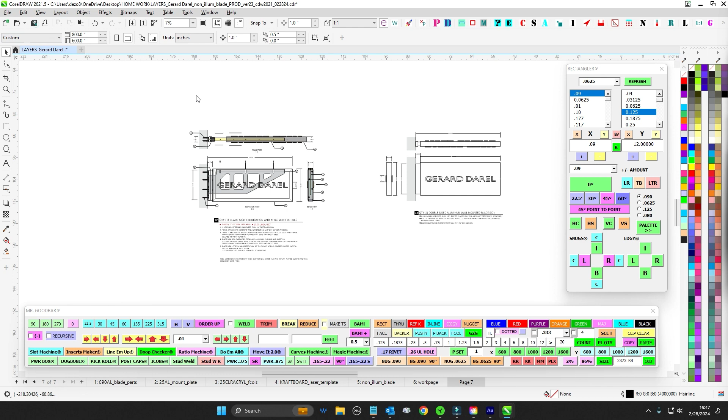All right, so real quick here, we got this Gerard Darel blade sign. So right off the bat, you guys can probably see that it's something you've already made before. It's this collar though that meets the wall. It's kind of funky how it gets kind of skinny before it gets to the actual blade sign itself.

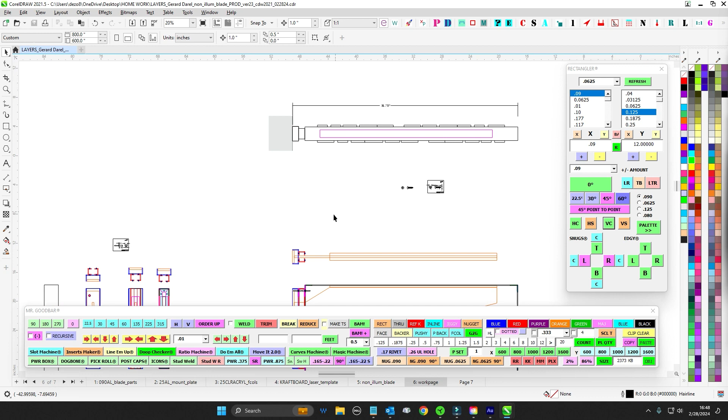So I just wanted to go over the order of operations because, as they say in the industry, it's hella fiddly. It's got all these little parts and stuff. So I just want to go over that to make sure you guys are clear. Otherwise, this shouldn't be that big of a deal. So let's get after it. So we got the lay of the land.

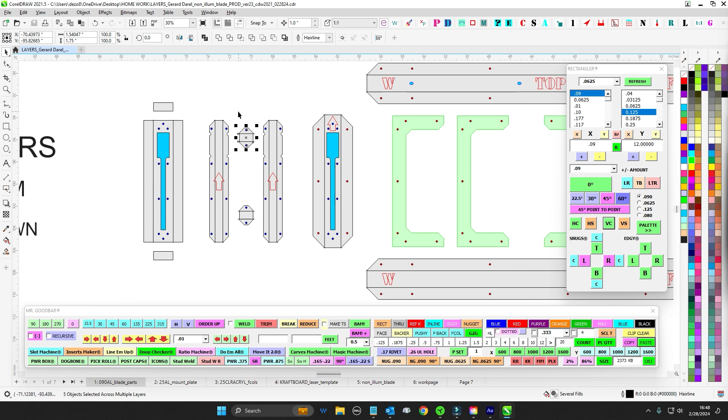So again, look for these little pieces. You're gonna have these little end caps. You've got these two little pieces. So don't lose those. Make sure you get all that. You've got the actual blade parts. You got your jigs and your two faces. The faces don't have any holes in them because it's going to be lasered out.

And then you're going to have your aluminum mount plate. This should look familiar to ones you've made before. So letters are going to go to laser, and then you'll have that Kraftboard template material lasered out. And then this is getting shipped out, so let's make sure all this goes. But we also have that pattern.

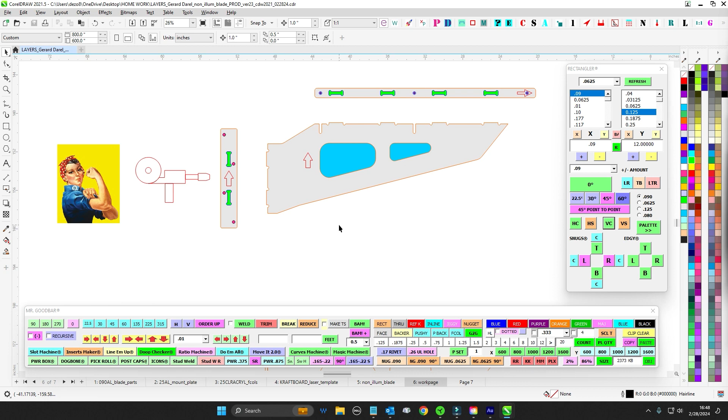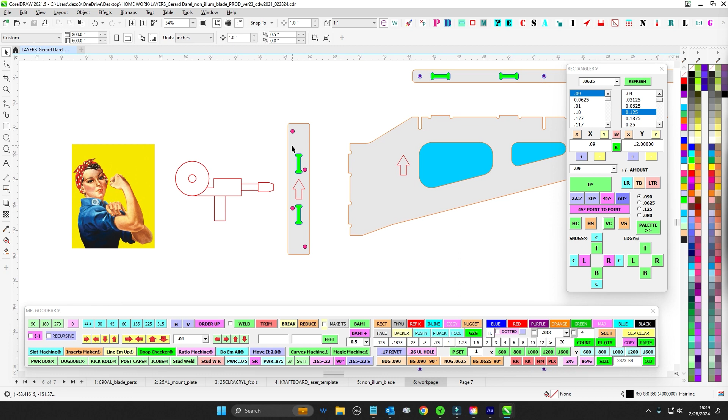But this guy here, because I usually give you guys a little side gusset, this one doesn't. So just make sure you're 90 and make sure it's welded up really well, because it's just got this sort of flapping out there in the breeze to support all of this. So just make sure that gets welded up good. And that's it. You're done there.

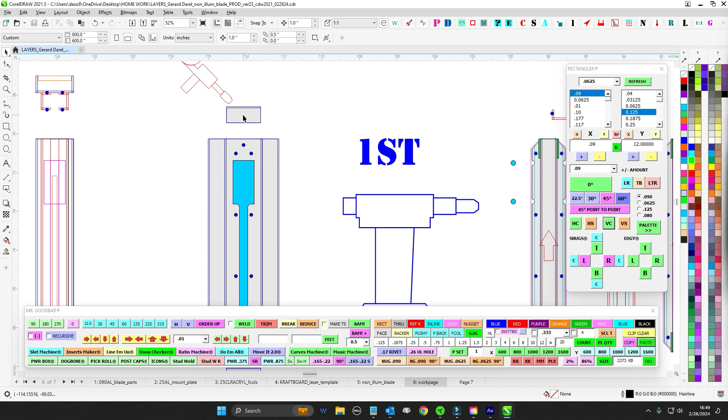So what I wanted to point out was this bracket system. You're going to have the part that meets the wall. Just bend that up C-channel and then tack in the end pieces there. Cool. And then you're going to bend up these little fiddly bits, and it's going to make this tiny little frame. It's only a 1/2 inch flange, so it is going to be kind of... and then the idea though is, see where these notches are.

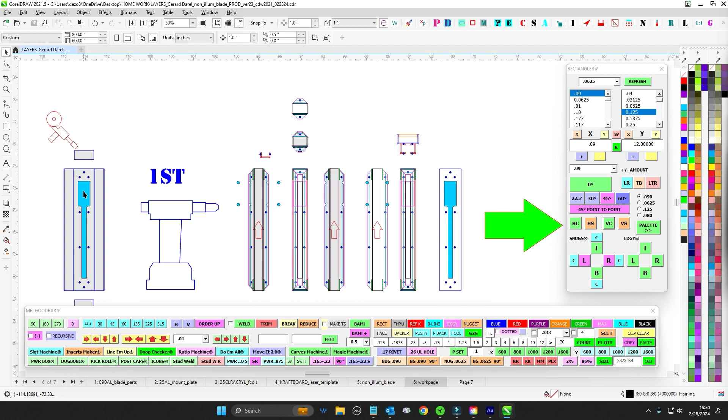This needs to get notched out to match this, because this notch allows this whole thing to slide over the bar. So you're essentially going to be coming up and over the bar here. And you can see where the hole, in between the magenta, matches the hole for this to go through.

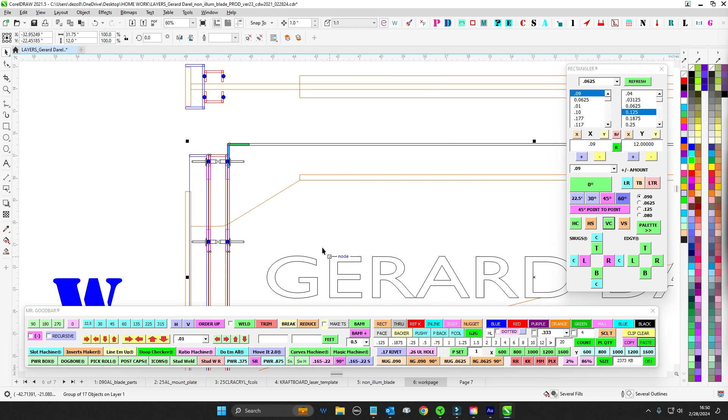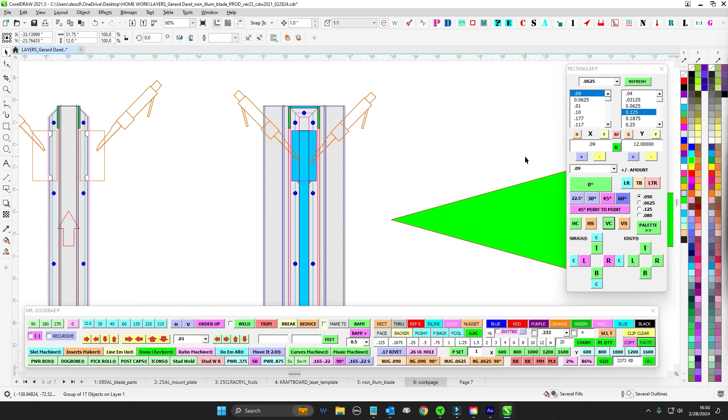So in order for this to get seated on there properly and to clear that, you have to have that big notch. Problem is that notches these flanges almost completely. So I went ahead and left them whole so you can bend them up without any fuss. And then from the beginning of this notch to this notch, you'll see where it has to be carved out almost to the flange. So it's about 1/16 away. So this is what I was pointing out.

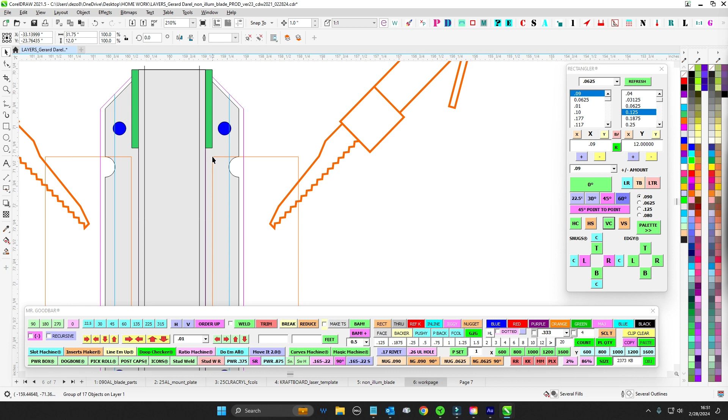So what you're going to do is get this bent up, get this welded, get these bent up. Now, it also occurred to me that maybe before you rivet this together, once you get this C-channel bent, take it over to the bandsaw, and you might be able to carve these out, about 1/16 from the flange. Or go ahead and rivet this together, but you'll see where that overlap needs to be carved out.

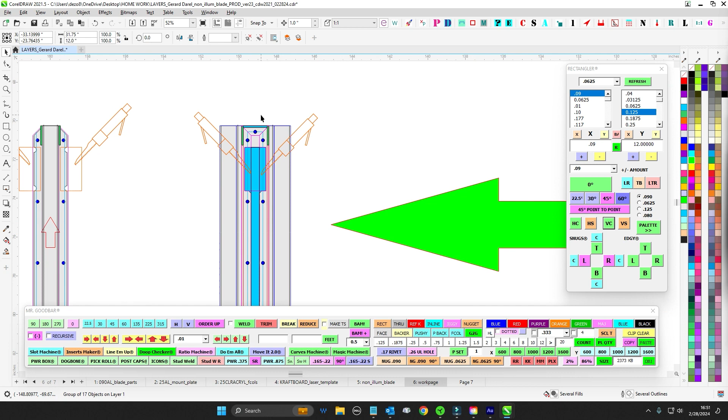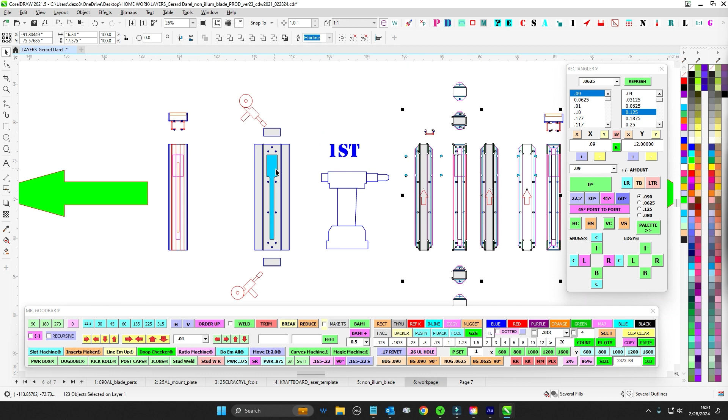Here's your jigs. W stands for wall. Obviously, this is the wall side. F is for the front. So make sure your F's and your W's match up. And then go ahead and tack this together. And then while this is still open, you're actually going to rivet from this side. Just rivet this whole operation once it's all together and cleared. Then you can rivet it to this, and that's it.

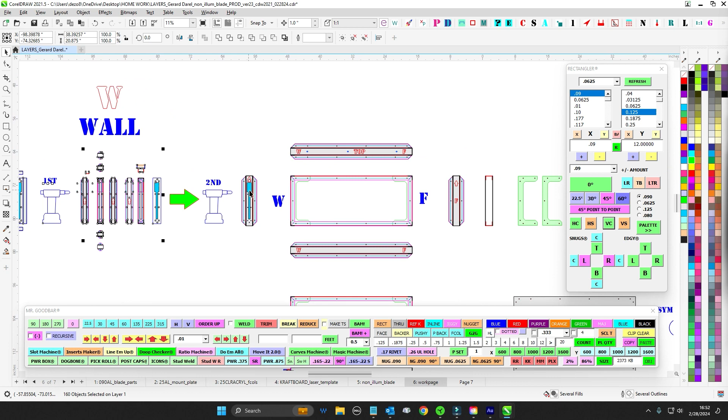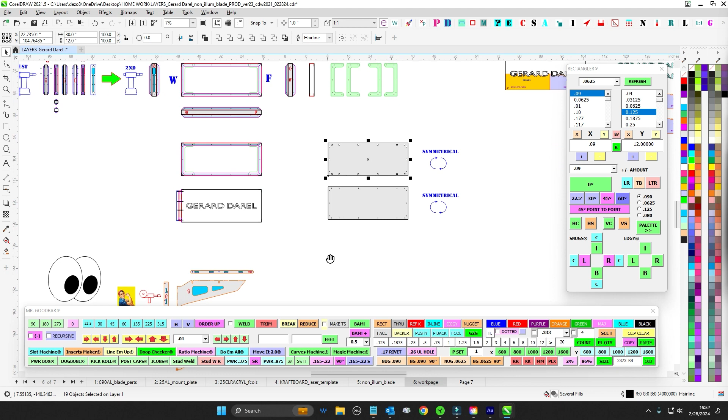So this will just be a little decorative thing that sits onto this. And that'll be the little guy there. So that's how that'll go. And then once you have that, you're good to go here. Like I said, these are all symmetrical. There's no front, back, side to side, because these are going to get lasered, and then final assembly after paint, somebody's going to have the luck of putting these in the corner there. That'll be fun for them.

So that's it. And then it gets shipped. So again, pretty simple. Just wanted to point that out. Watch out for the fiddly. Don't lose the parts. We're good to go. Other than that, good luck.